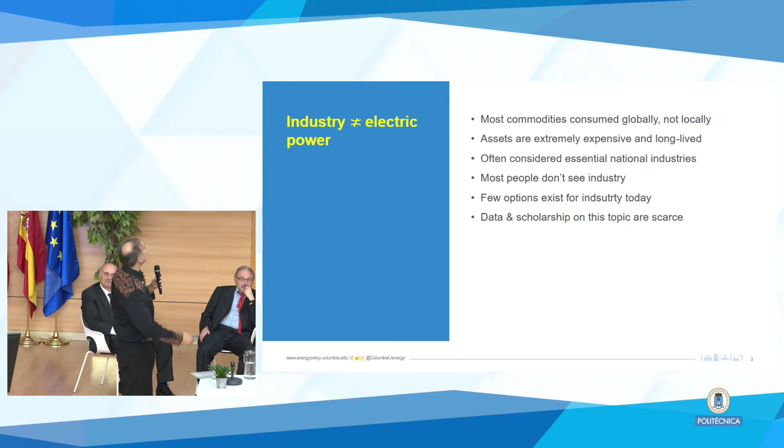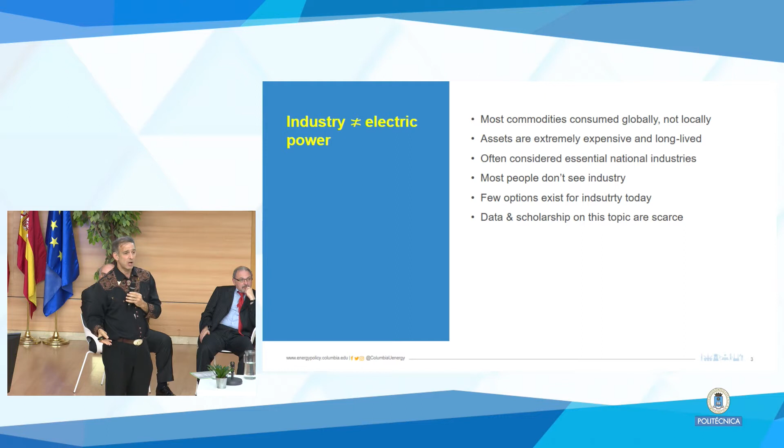Most people see power, most people see cars, most people see planes and fuels. Most people don't go to the store and buy 10,000 tons of concrete. So the question is, how do you get this in people's eyes and minds?

It's a hard challenge. The really bad news is we do not have a lot of options, and the people up here have mentioned that, and they're working on good options, and I'm delighted to see it. But we don't have a lot of options, and we need better and more.

What we found most daunting as we started all of this work was that there was no data. There was no data. You couldn't go out and find it.

Nobody goes out and buys heat, and they don't recognize it in the industrial settings, like everything's set forward in tons or kilowatts. They're not gigajoules.

So it was really hard to start working on this project. The good news, though, is that we have good news. First, some more bad news.

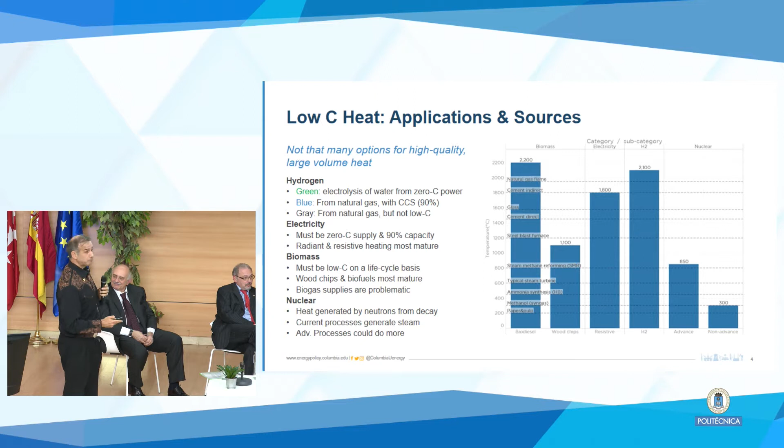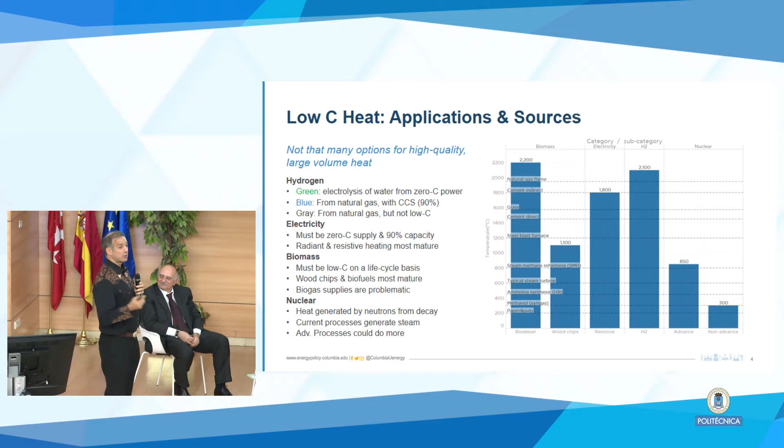The most important thing about heavy industry is the high temperatures required. This is what makes it so hard to electrify, and it makes it so hard to deposit the heat in the reactors. So steel starts at 1,200 degrees Celsius.

Cement is 1,450 Celsius. There are not a lot of options to do that. Biomass can do it with biogas. That can hit that temperature. Electrical resistance heating actually can reach that temperature. You just can't put the heat in the reactor.

So that's a problem. Hydrogen can do it. Nuclear can't. Nuclear is not hot enough. So that's a pretty small deck. There's not that many things you can do.

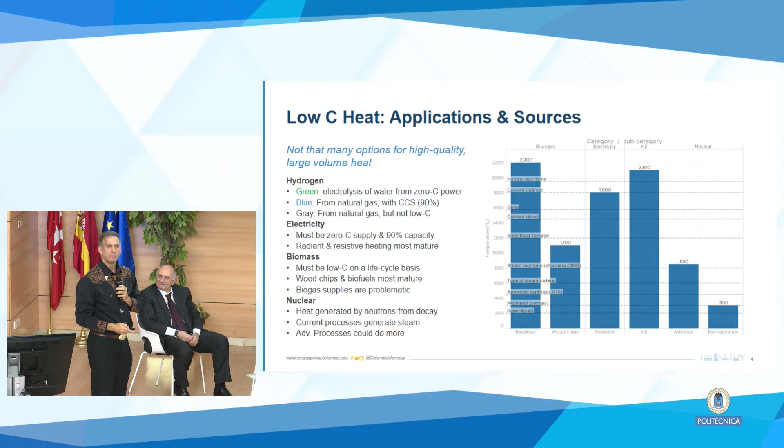So we set out to do a big techno-economic analysis.

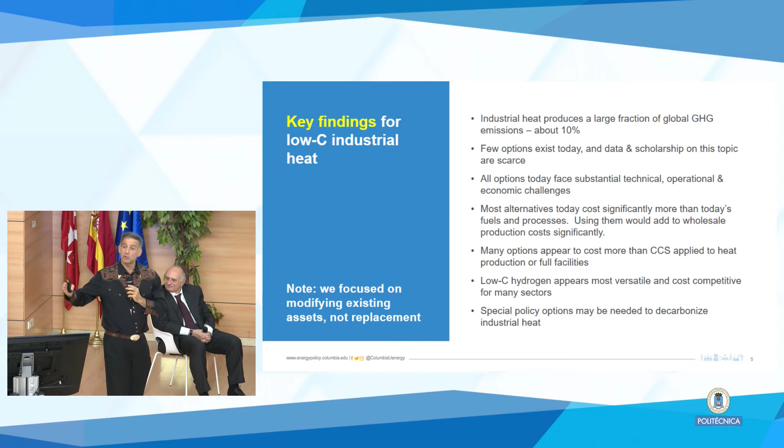These are the punchlines. I've gone through the first ones today, and I'll sort of unpack the later ones as we go. One of the things to recognize, and this has already been said, is that when you look at the comparison of options for deep decarbonization, carbon capture and storage ends up being important.

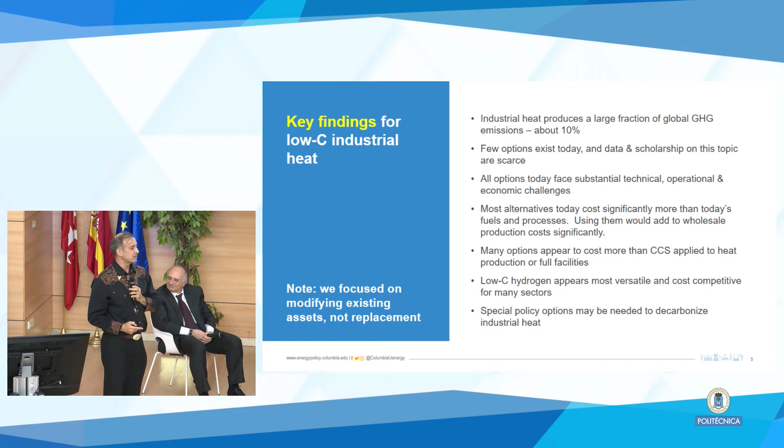It ends up being the thing you have to do if you want to get deep emissions reductions. Also, low-carbon hydrogen ends up being really important. We saw that from Martin Pei's presentation and from Alberto Aragonés' presentation. Low-carbon hydrogen is important, there's lots of ways to get it. In all cases, we're going to need better policies. The markets can't deliver this today. We just need a new set of policies that can protect domestic industries or provide large enough incentives to finance whatever it is we need to do.

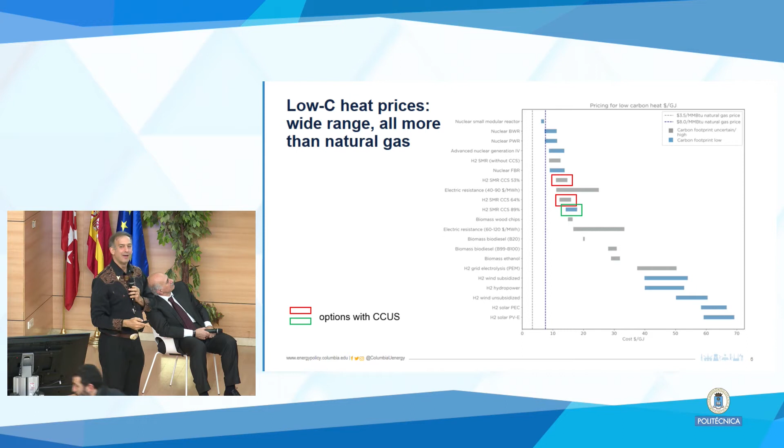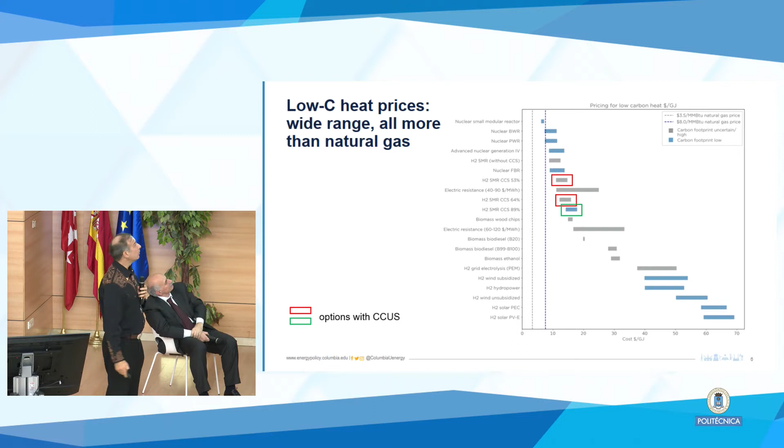Another thing you'll find is that many of the options need CCS. For example, for low carbon hydrogen, the cheap option in most markets is CCS. The reason is that most places do not have cheap low carbon power. Sweden is an exception, Sweden does have cheap low carbon power. America does not, China does not. So that makes it hard to use there. And even things you'd think would be straightforward, like biodiesel or hydropower making hydrogen, in most markets it just doesn't work.

So that's quite expensive, actually, and we are not close to having zero carbon, firm, cheap power yet. We need to work on that too. Lots of good people are working on it, we know it. But until we have this, electrification remains a challenge because it's not cheap or carbon free.

So let's talk about hydrogen. I'm a big fan of hydrogen. We make hydrogen today at enormous scales. It's a globally used commodity, and it's pretty cheap. Cost of making hydrogen today is about $1.20 a kilogram, and that's good. That, for the record, is more than the cost of natural gas by quite a bit, but we know how to make it at enormous volumes.

We also vent the CO2 from steam methane reformers today. That all goes up into the air and oceans, and that's bad. If you wanted to capture that carbon — what we call blue hydrogen — you can do that today. It adds about 50% to the cost. That's more than people want to pay, but it's not a huge amount of money. We would know how to do that. You can't do it everywhere, but you can do it in most industrial ports — Rotterdam, Texas, Tianjin, Teesside, Aberdeen. There's places you can do it today because we have the storage.

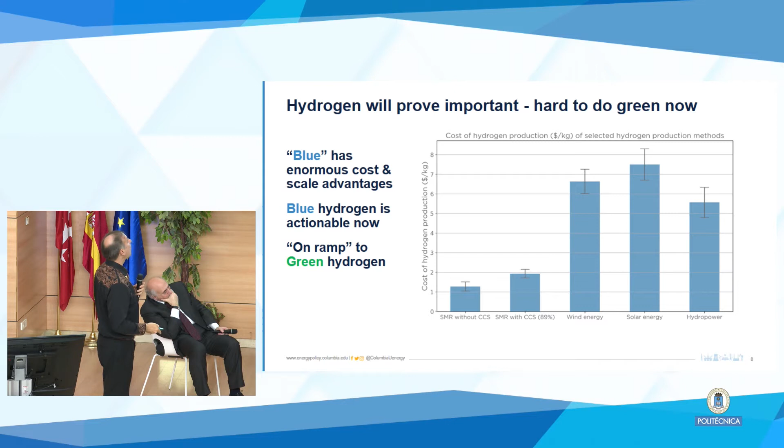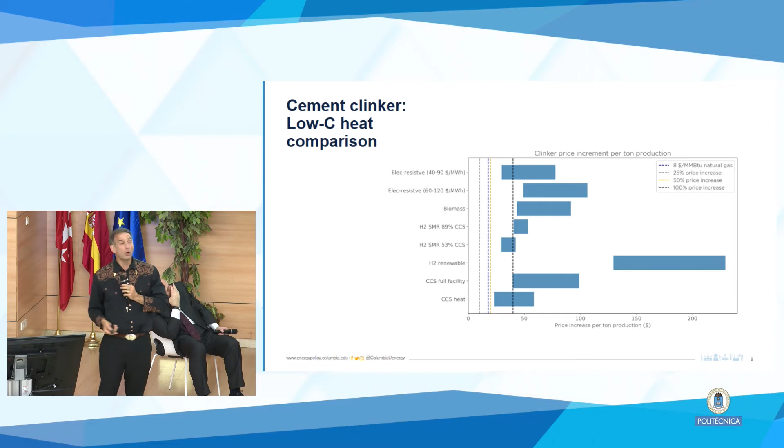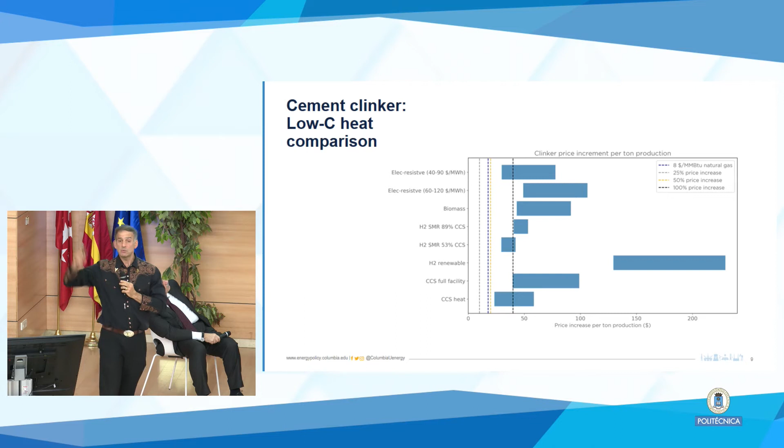We've talked about these things in dollars per gigajoule, but nobody goes out and buys gigajoules, they buy steel. So what do these things look like for real? We put in prices. If we took various kinds of heat, electrical resistance heating from the grid in the United States or Europe, or biomass, really good blue hydrogen or not so good blue hydrogen, renewable hydrogen, or CCS on just the heat, or CCS on the full plant with process emissions too, what does it do to the price of the commodity? Because that's what people really want to know - how much more do we pay?

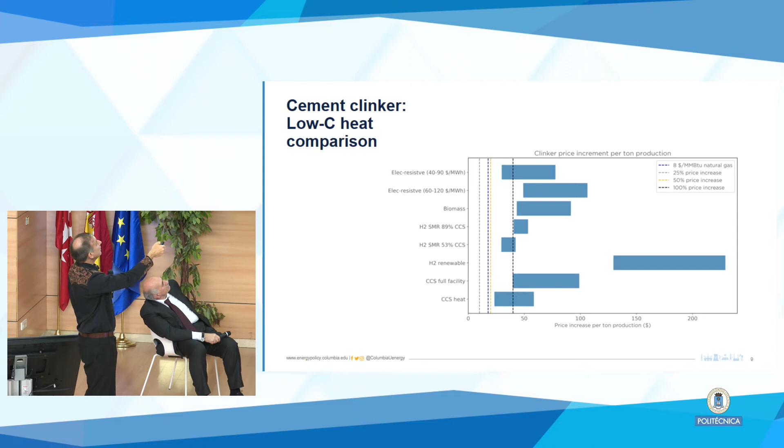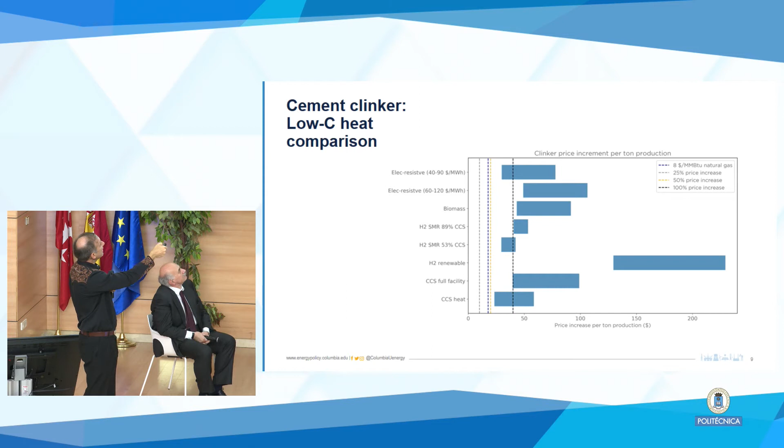So this is for clinker, and this is the price for a 25% increase, 50% increase, 100% price increase. That line there is $8 gas, which is an Asia price or something like that. Most of these options more than double the price of production wholesale concrete. That's what the deal is.

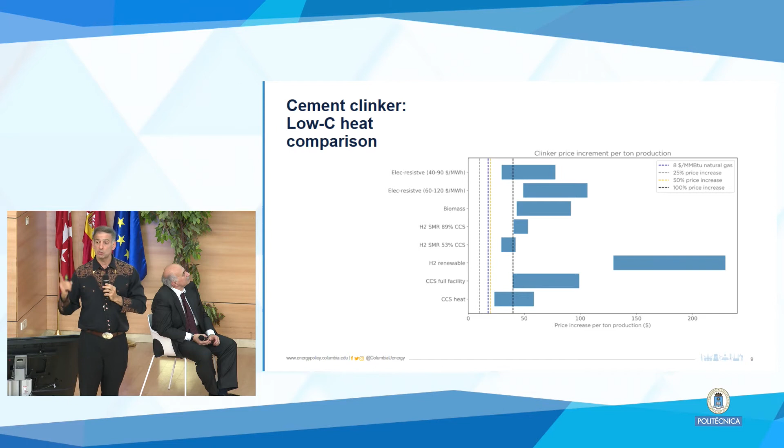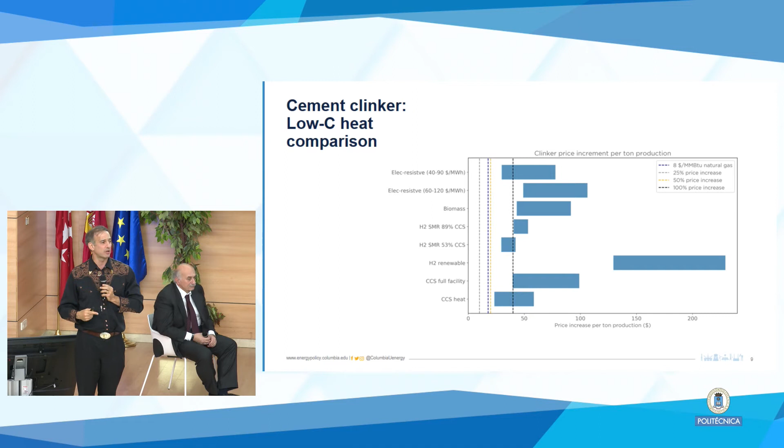Interesting fact though, it does not double the price of the finished product - it doubles the wholesale price, but not the finished good. For example, if you built a bridge out of concrete, the price of the bridge goes up only 1% if you double the cost of concrete. This means government procurement is a very strong policy option, because the government buys 50% of the concrete in the world - they could add this. Most of the cost of a bridge is labor, time, land, design, and other things. Same thing's true for steel.

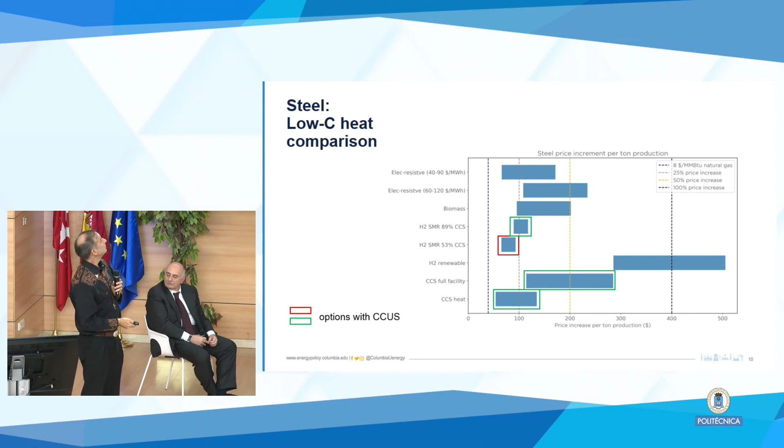Same thing's true for steel. Steel's not so bad, but steel's more expensive - $400 a ton. So that's the price for European gas, 25, 50, 100% price increase. Again, the cheap options - CCS on hydrogen - great. It basically adds quite a bit to the price, but if you double the price of steel, you increase the price of a car by only 2%. The finished good is not that much more expensive.

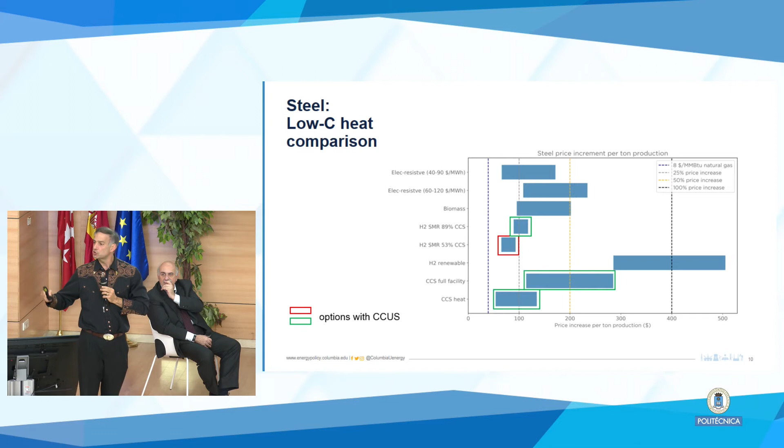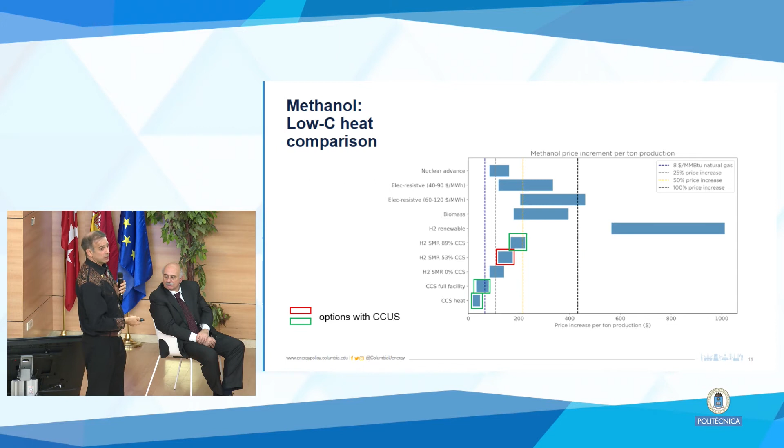This gives us policy options to consider. Same thing with something like methanol. Here again, CCS ends up being useful - it ends up being cheap, it ends up being not so bad.

So what are our recommendations? First of all, we've got to focus on this. There aren't research programs on industrial heat anywhere in the world. We should be working on this - that's a good thing to do.

Second, we need more and better options. CCS is likely to prove important, but I'm not satisfied with that, and you shouldn't be either. We're going to need better options that are cheaper and more effective.

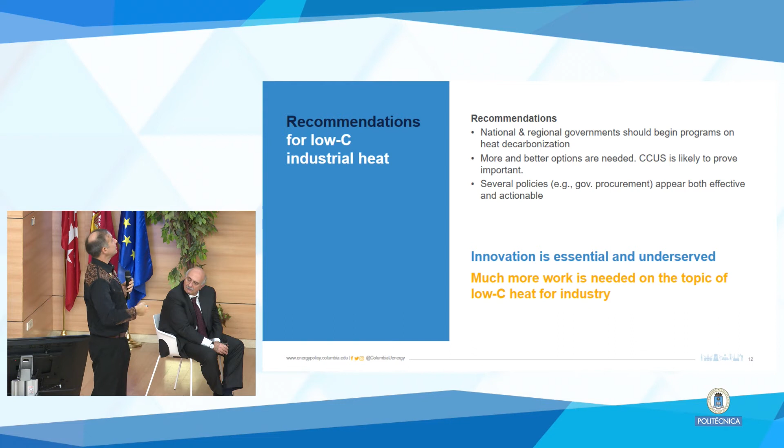The last thing is we're going to need lots of policies, including things like government procurement, and they seem kind of effective and actionable today. We need a whole lot more innovation though. If we think we're going to solve this problem with the tools we have today, we're kidding ourselves. We know that's not true. We need to work on this a whole lot more if we're going to solve the problem.